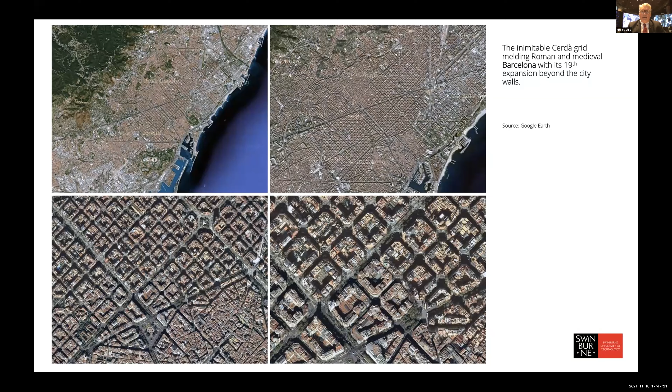I imagine a lot of people listening tonight will have been to Barcelona. I haven't met anybody yet who's not enchanted by it. There's so much on offer, and we're inclined to think what happens in Barcelona can only stay in Barcelona, but I wish we would find ways to bring more of this amazing texture to us.

So Cerdà actually was the architect, although he's an engineer, for the layout of Barcelona, that gives it such a distinctive look. And in 1859 he was given the task, first of all, to survey the area outside the city. As you can see on the slide on the right, when you expand a city, you consume all the wonderful arable land. In the case of Barcelona, it would have been cultivated for centuries, and that's the land that becomes the new city. It's bizarre. We do it too. We can see it happening to the west and to the north of Melbourne.

He was asked to find out where the opportunities were for growth, because it was impossible for the city to stay within the city walls. And he came up with this fantastic plan based on a theory which is Polycentric Egalitarianism. The idea was that Barcelona would not have a center, and to this day, it still doesn't have a CBD like most cities. It's polycentric and egalitarian because everyone was supposed to be able to walk to all the services they need, the schools, the shops, the hospitals, and their friends.

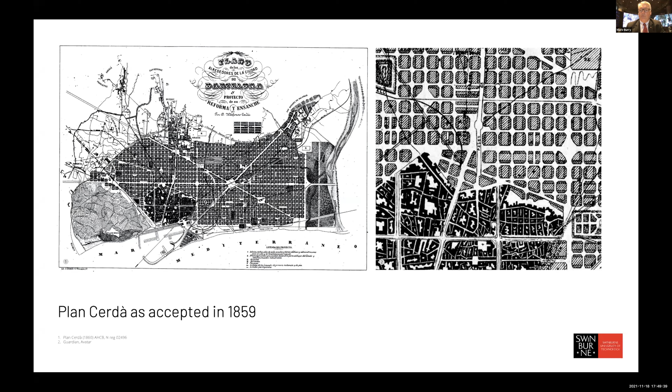And originally, you can see from the plan on the right, he separated the pedestrian infrastructure from the vehicles. So the vehicles were going up and down the streets in one way. But if you can see the lighter hatching between each block, that was meant to be parkland. And the idea was that you'd filter your way through. It started off well, it didn't quite complete. But the other great innovation was that he actually put all the railways underground, even at that date. So there's no grade level crossing removals required for Barcelona because they're already there.

He coined the term urbanization, so urbanism, which is a fantastically wide discipline. It's not a single discipline. It involves everybody who has an interest in how cities are created and evolve and function. And he made this 3-volume collection, which he eventually published in 1867, which includes maps. It's a book full of tables because he was one of the first ever to actually use statistics by measuring the city and how it functioned to work out what was the best plan for Barcelona.

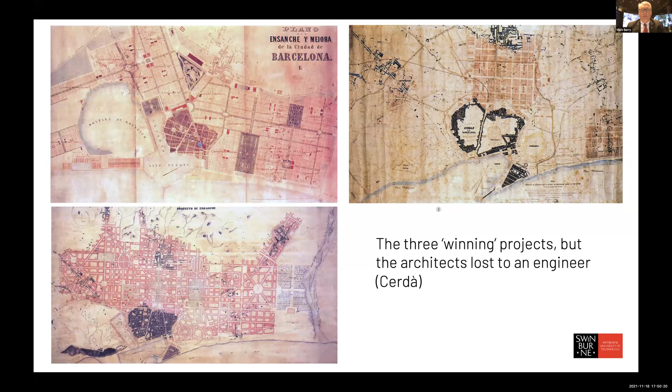3 architects won the competition for the extension of the city, but in fact they were ignored, and it was the engineer's plan. He even thought about trams, everything was all thought through. Yet when you look at it now, this isn't quite the Barcelona that he'd planned. It is polycentric. It's reasonably egalitarian, but it certainly doesn't have the separated pedestrian and vehicle infrastructure that he wanted.

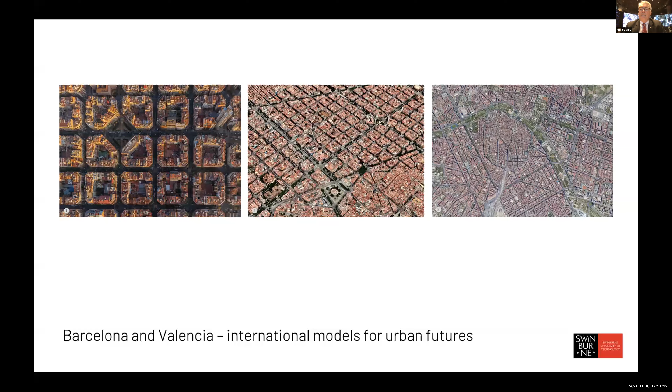The image on the right-hand side is Valencia, just to show that Barcelona is not the only fabulous city in Spain. Valencia has a river that used to flood, like a lot of rivers do, but instead of just sucking on it, they actually diverted it in the 1980s, 1990s. Now the center of Valencia has this elongated park running through the center. You can read the modern city with the medieval city in the core, and you can read this brave decision of diverting a river to make this linear park down the middle.

So Gaudi, what can we learn from him? I thought Gaudi architect plus because he was the original polymath. He's the only person that I would regard as genius that I've personally been associated with, albeit posthumously, through looking at his work. There was nothing he couldn't do other than finish his buildings on time and on cost. But I think that's a small detail for an architect of such caliber.

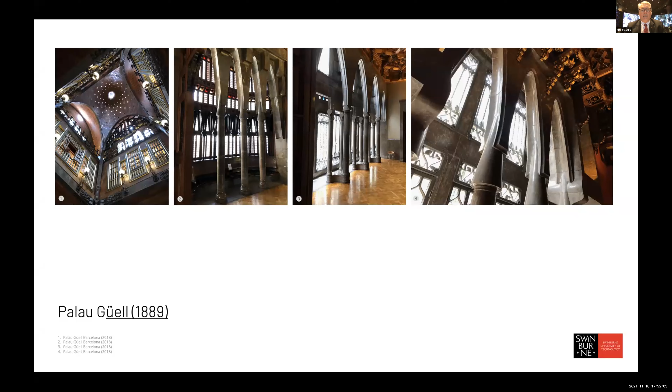Haven't got time to give you a tour through his work, but even just taking a townhouse like this one for his patron, Eusebi Güell, one of his first projects. So he was now qualified about 10 years. He was already out showing that he was pushing the boundary in every way possible, structurally, philosophically, light, heating, air. Even this building had a natural air conditioning system for the stables down below.

But one project defines Gaudi. This is what I regard as his best work. It's not his most important work, which is Sagrada Família, which I'll explain, but it's his best work because it's the quintessential Gaudi who actually understood the forces of nature, and that the architect and the engineer would have to come together if you're going to build a building that is going to perform optimally with these forces.

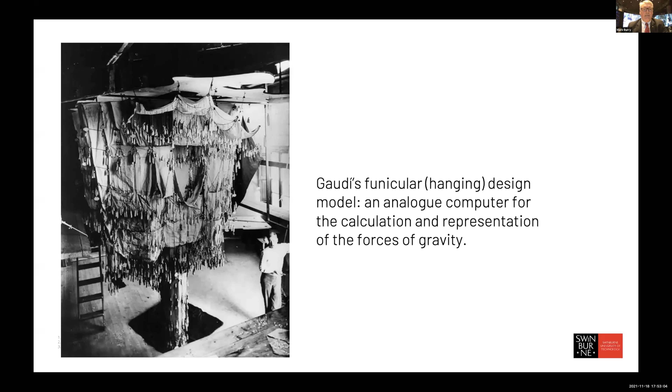So he designed the building as a model upside down. So you can see it here. Little bags of bird shot representing the weight of the building, so that he could see gravity itself describe the form of the building. Once it finished, and I must say it took about 10 years for this model to be constructed, it was painstaking.

You can see on the left-hand side, he just took a photograph, an example of Gaudi having to go into modern technology against his better judgment in order to photograph it, so that he could actually produce the client representation. So the client, it's an undrawable building, which is what drew me to Gaudi in the first place. In this case, he's photographed the buildings and then painted over them after 10 years to give the client a sense of what they're getting.

And then from the point of view of the builder, the same model, which was constructed in a shed next door to the site, just outside Barcelona, at a scale of 1 to 10, the builders could just measure off the model and build the building. And when you see the interior, it is just extraordinary. I'd love to talk about it in detail, but every single line of structure you're seeing here is meeting the forces that it's designed to accommodate head on. There's no bending forces being transmitted whatsoever.

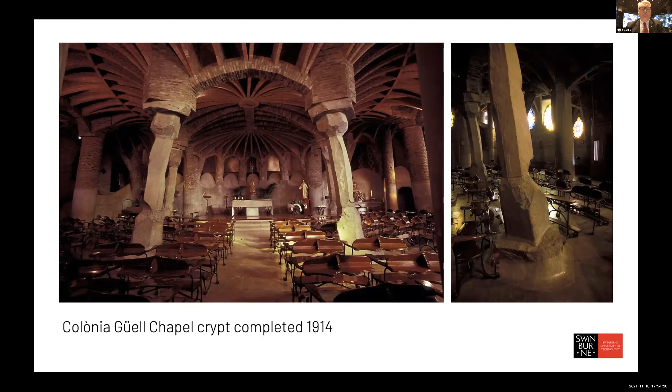And just one other thing to note that in this building, there's not one piece of steel or concrete. This is all just stone and brick laid using the time-honored Catalan vaulting technique. Just one sensational space, but unfortunately just the basement, because this is one of Gaudi's several heroic failures. After 16 years on the job, the client became infirm, and his children decided that this wasn't going anywhere fast.

When you look at the actual fabric of just this basement and the fabulous space of the crypt, you can see that enough was built for us to have a spine-tingling recognition that this is what genius looks like when you're trying to build sustainably. He's used brick only where it's required. You can see the lines of force where he's using a very modest amount of brick, and everywhere else he's used clinker, which is the byproduct of bricks that have been overfired.

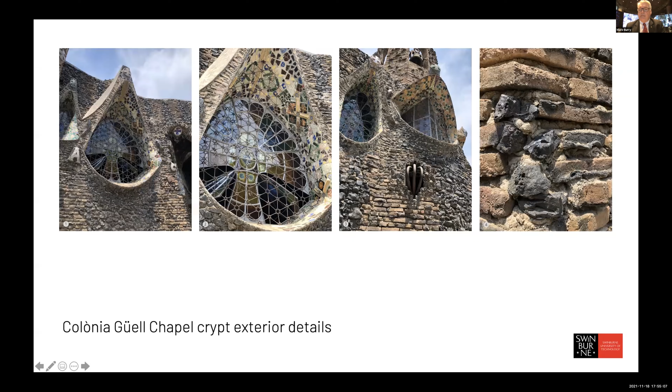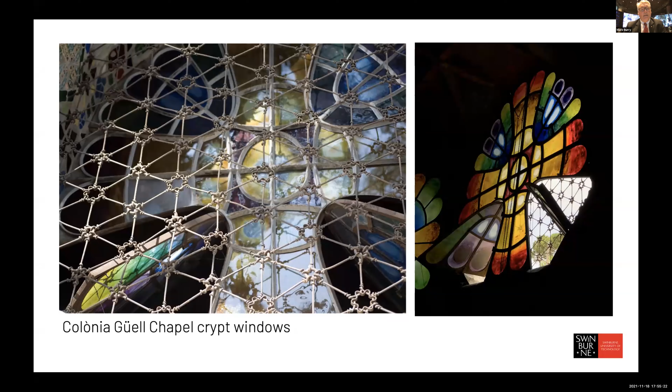Even the windows, you can see, are conceived as butterfly wings. There's the outside and the inside. And in terms of sustainability, he's also using the needles from the corduroy factory, which is what the little church was associated with, when they were discarded. Instead of throwing them away, he had craftspeople make them into these wonderful grills.

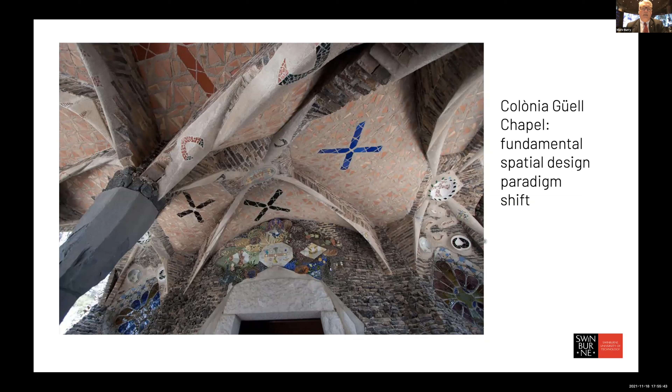But this is the slide. This is the fundamental spatial design paradigm shift that he brought to us, which is to think about what happens when you design something so complex that an individual can no longer have successful carriage of it. He must have realized towards the end of his life that he had far too many wonderful works that weren't finished, not least the Sagrada Familia.

And another thing to realize is that he was of his time. He wasn't some freak. Theo van Doesburg in 1924 wrote this fantastic manifesto about the new architecture. He includes: in architecture's next phase of development, the ground floor plan must disappear completely. The two-dimensional spatial composition fixed in a ground plan will be replaced by an exact constructional calculation, a calculation by means of which the supporting capacity is restricted to the simplest but strongest supporting points.

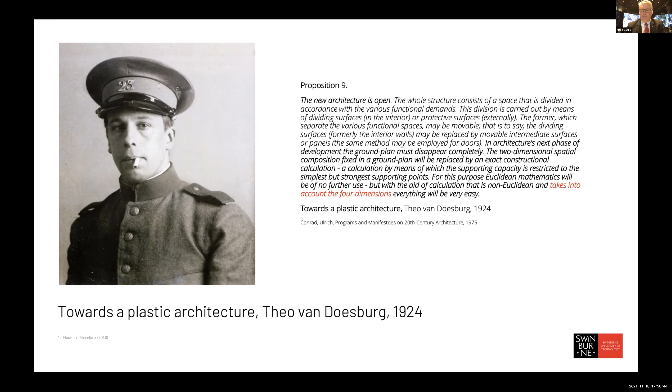For this purpose, Euclidean mathematics will be of no further use. But with the aid of calculation that is non-Euclidean and takes into account the 4 dimensions. Everything will be very easy. I didn't put everything will be very easy in red because that was exactly the problem. It wasn't. But it certainly was a fantastic shift from two-dimensional plan to 4-dimensional thinking. And that is what has been gifted to us as architects today with this wonderful invention of computers as digital agents to assist our creative energies.

The indulgent client: many factors contribute to Gaudi's uniqueness. His client, Güell, gave Gaudi complete liberty to set up this building laboratory to test his new approaches to design. The architect had throughout the years developed new methods of working which gave him initial unconventional 3-dimensional answers obtained with the help of scale models and full-size mock-ups, and without using the drafting table technique and its consequent limitations. We may say that the chapel, which is what this piece refers to, was not conceived or born as an ordinary building would be in any architect's office.

So you can imagine as a young architect setting out, what was being offered here by Gaudi was a way to completely rethink the way we design buildings and how we translate them into construction. And that's what we do when we learn from the Sagrada Familia.

The Sagrada Familia is not his best building, in my humble opinion, but it's certainly his most important building because of the fact that it had to be continued so long after his death without him there to help us.

Just making sure my time is working.

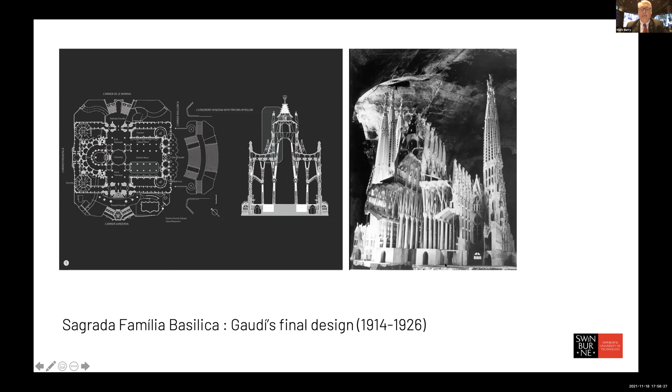I'm hoping you're all familiar with it. That's what it looks like from the outside. I'd like to say that it was a building that took him some years and iterations. He wasn't the original architect. He left in the end some plans that were destroyed in the Civil War of 1936 and comprehensive 1:25 and 1:10 scale models, which have now been translated into this incredible space.

These are photographs that are really designed not to give you the experience of being there, but to give you a sense that if you haven't been there, then you should go as soon as you possibly can. The interior effectively is completed.

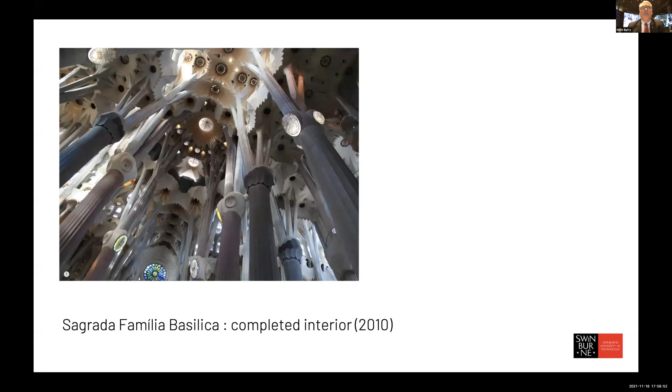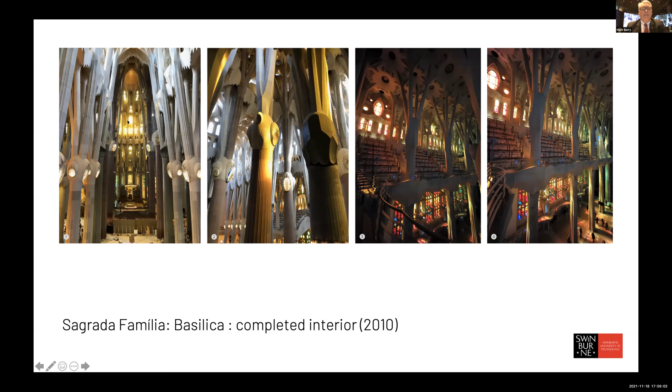He conceived of it as a forest with great columns, which are the trees and branches reaching up to the light. And we can see this play out in the tectonics of his decision-making. It's got colored glass along the 2 lower floors, but the upper floor is white glass. So you get this heavenly white light way above, 30 meters and above in the space.

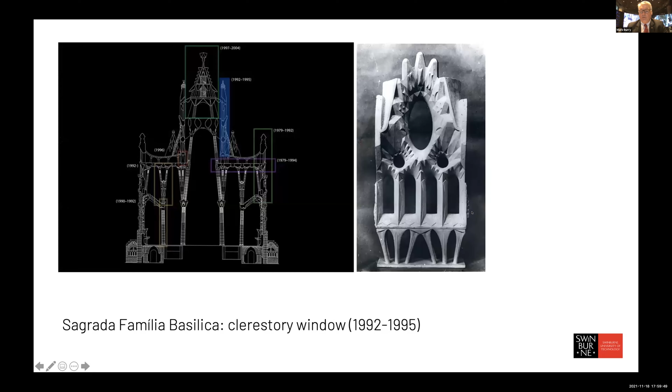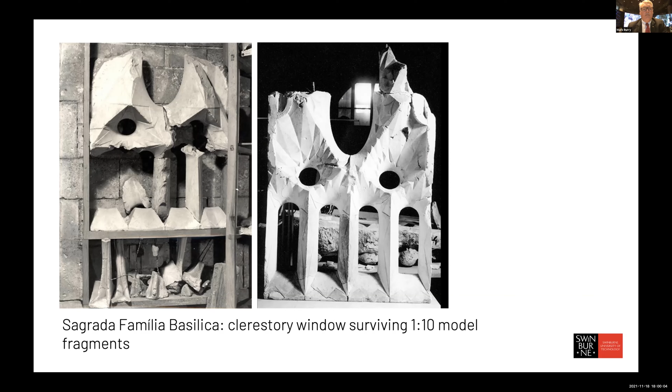I had to rethink everything I'd done at school. Nothing that was being asked of me at this time was something that was familiar. I was being presented with these pieces of broken model and asked to extract the geometry from them, because that's what the 2 90-year-old architects, my bosses, were able to bring to the party. They knew that he had a system, but nobody up to that point had a chance to unravel it.

And unraveling it only came when I took my architect's hat off. I put on that of a geographer and realized that I wasn't drawing these models, I was mapping them. And so I realized that I'd understood the geometrical consequences of surfaces which intersect in space. 2 surfaces intersect with ridges, and 3 ridges will intersect at a peak, known as a triple point by the mathematicians. And you can see on the slide on the right, that's exactly what I had to do.

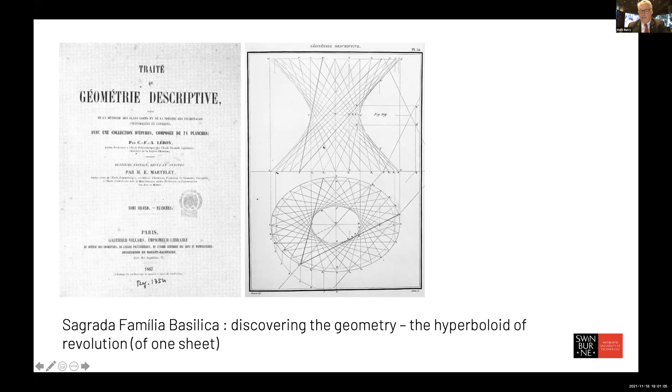For our Vice Chancellor, I'm sure she'll be pleased to understand, if you didn't know already, that Gaudi learned all his descriptive geometry from Leroy. This was the classic text for his time. 1/6 of an architect's training in the 19th century was learning all about descriptive geometry, and Gaudi uniquely understood the value of this geometry, which have lines in space which intersect on points. So any point on the surface will have 2 straight lines going through it. This means, in a nutshell, it's easier to describe to someone building it what they have to do.

I have an animation which I really don't have time to play, but I will do so anyway because it shows the theory. Gaudi was thinking in 4 dimensions. These surfaces aren't fixed when they're made in stone. They're implicitly derived from these hyperboloids of revolution. He saw them as fundamentally as sculpting. So even though we're using a computer here, we're actually crafting the surfaces by sculpting away from the notional stone.

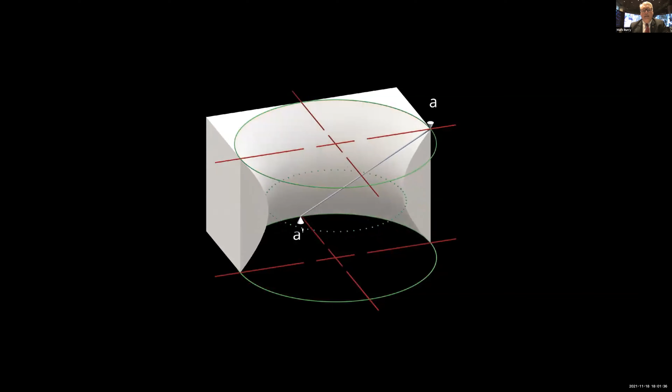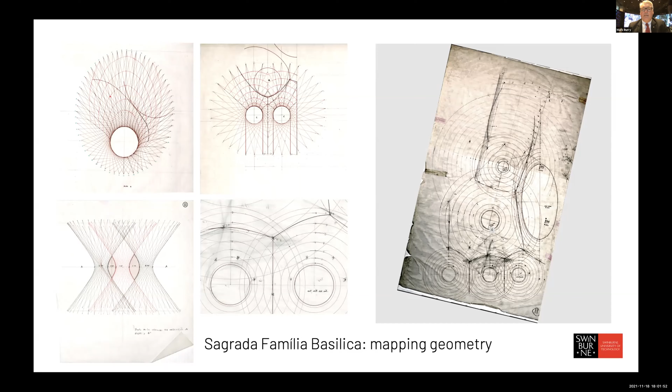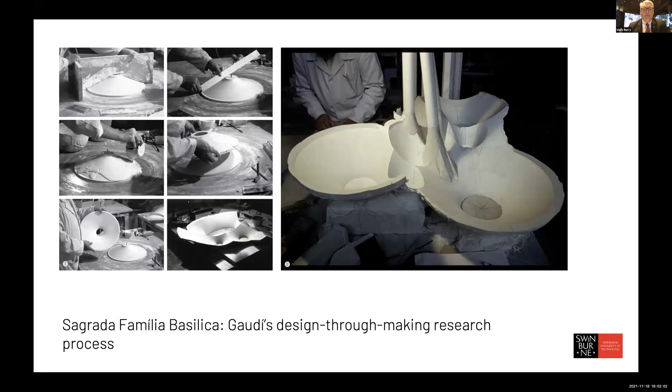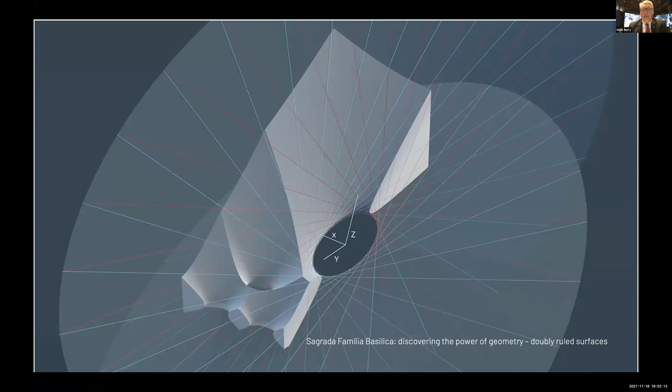But of course, I didn't have computers then. I had to think on my feet. So I was using descriptive geometry, thinking as a map maker, not as an architect. I had the legacy of the model makers who had been using Gaudi's own method for making models, which was Gaudi's way of working. This translated eventually into digital design, and I'll skip that video, and I will skip that video. I hope it's intriguing. And this one, which I'm going to skip too, it's also intriguing, but you can see this is what Gaudi was doing in his head, this fantastic ability to sculpt in 4D.

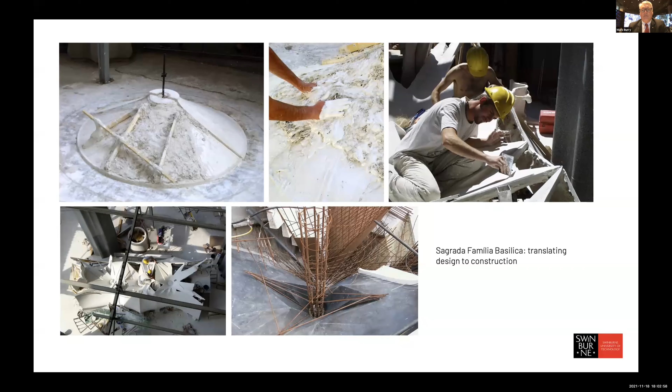So we actually translated his model making technique to one-to-one in order to make the molds to build the artificial stone. And also we had to translate these computer drawings into practical information. And you can see here just very quickly, the straight lines that describe the geometry are being deployed to build the formwork for the traditional Catalan vaulting.

And down on the bottom right, you can see that these geometries even have the most optimal arrangement for structure, because this is reinforcement, which is going exactly along the lines of the geometry, but also the lines of force. And there we have it.

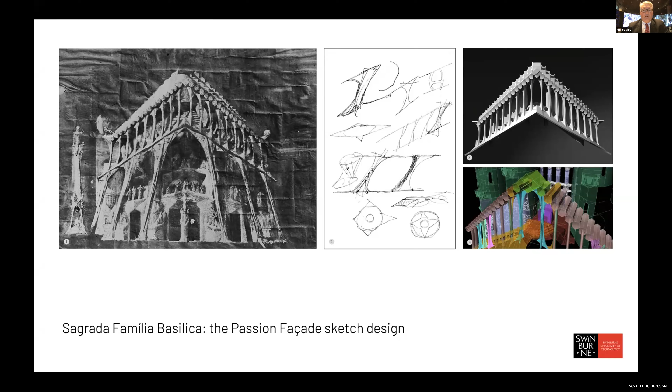The passion facade was when we started stepping beyond the modeling. We had to work from just this one drawing. And as you can see in the middle, we always begin with the sketch. We've never thrown away the pencil for the computer. But at each time, we think of new ways to work.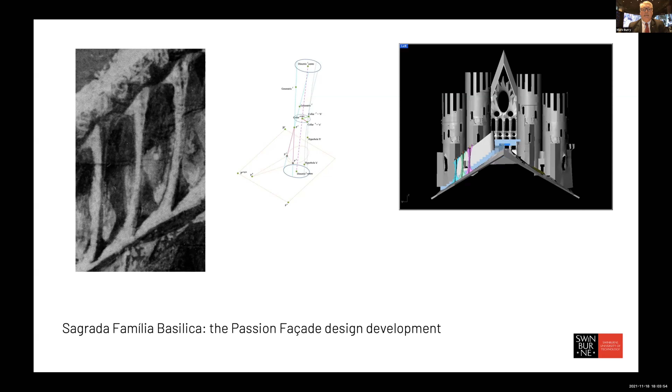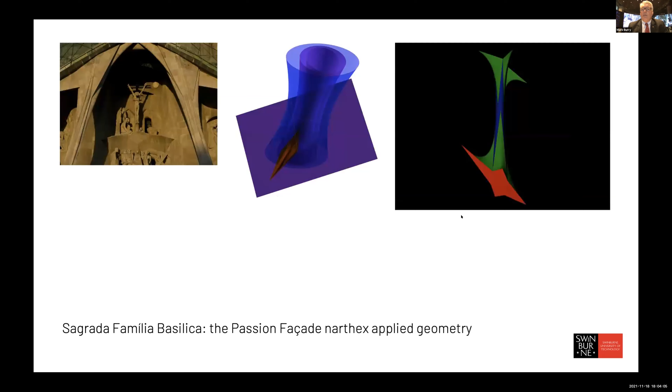You can see here, the only drawing of relevance is the one in the center, which is the schema, which explains to the computer scientists we're working with how this parametric, that's a flexible model, would be constructed so that we would be using Gaudi's surfaces exclusively with no fudging. This is actually mathematically very sophisticated. Also very controversial, because we didn't know how these columns would be seen.

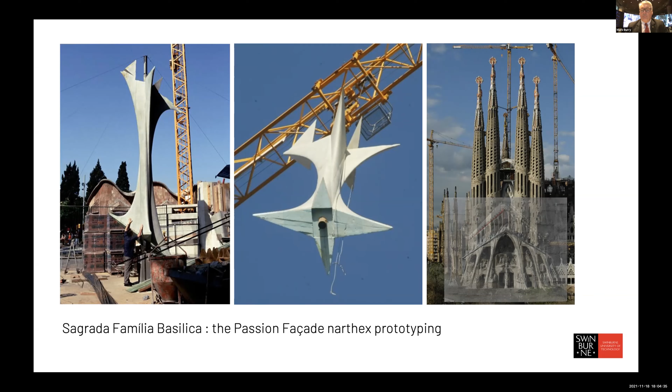So again, another shout out to France, because we went to Perpignan, where they had a machine that could carve polystyrene for us. This is in 2005, very hard to source that technology. Now, of course, it's abundant, only 16 years later. We had a polystyrene column made at full scale, which was then painted and put up on top of the passion facade, so we could see it for years.

Another shout out to France. You'd think there's some sucking up going on, but it's just true.

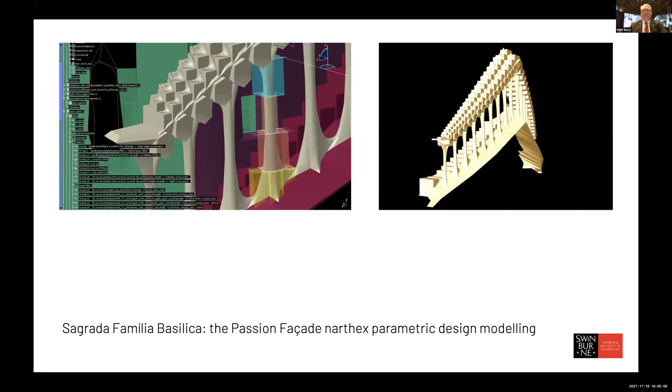This is CATIA from Dassault Systèmes. We couldn't use architectural software for this project at all. We had to go to engineering for aeronautical and ships and vehicles. And you can see on the left, the model by Jane, my partner, and on the right, the outcome of a 100% parametric version of our design for the passion facade.

So the first use of parametric modeling in any architectural project, and certainly the first use of robots for cutting stone, as you can see for the production. Oh my goodness, this is also interesting. This is a granite from Tarn, central France, which is the source of the best granite possible for this purpose, even though it's the wrong color. We wanted a golden color, but we had to go for the gray.

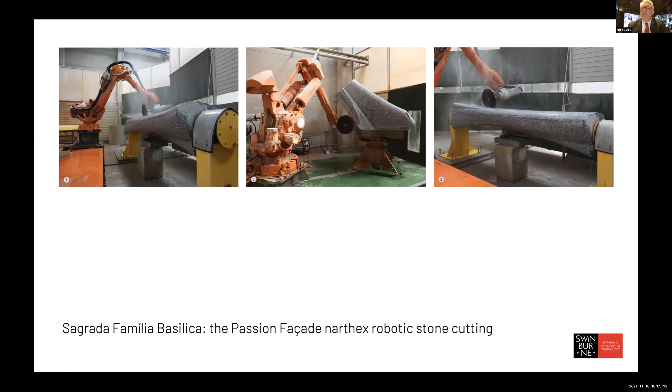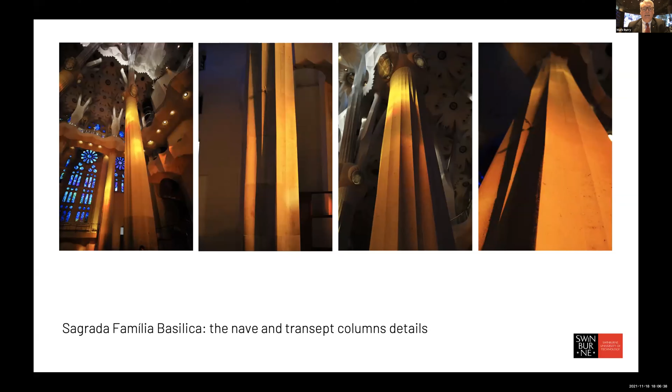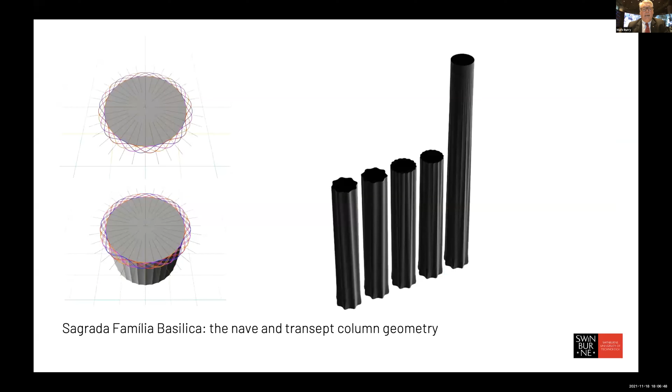I'd love to tell you all about these columns, but what you need to know is that they look abstract in terms of their sculpturing, but of course there is some geometry underlying them. They're playing out here. It's too big a story, but we'll show the video for this because it does attempt to give you a sense that this isn't accidental.

For instance, the 8-pointed column is 2 squares which are opposed by 45 degrees. You have a concave and a convex parabola drawn. In fact, it's a hyperbolic paraboloid, but you're seeing it in section. And this gives us a profile which cotangentally circumscribes the whole of the column and becomes the base. But in fact, it's not just one profile, it's 2 profiles.

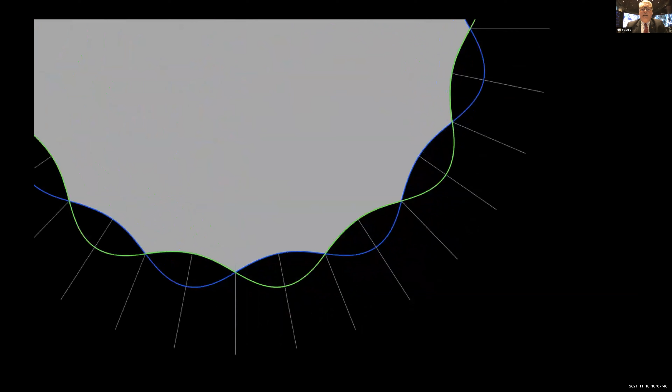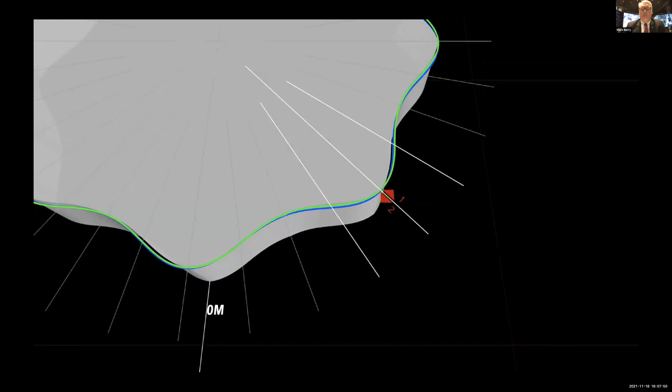And as the column gets higher, these two profiles counter-rotate. So the column itself is that material which is in common to the blue and the green profile. So here is the 4th dimension played out. I feel this is not a good idea to, I would normally talk about this for an hour because it's just so sensationally rich as a philosophy for generating a surface so simple. Two counter-rotated profiles, just as the column goes up, that's the 4th dimension playing out.

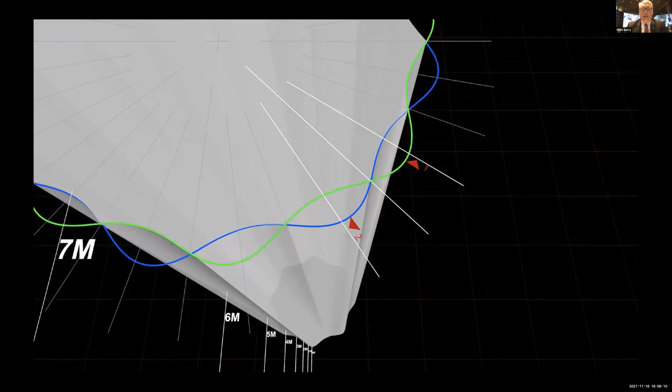Here you can see the column emerging. You might wonder what happens when it gets out of phase at the top. Well, I'll short circuit that one. The columns multiply, so then you get 2 profiles at the green and 2 at the blue. So this is what you'll see if I can just move this along a bit.

This gets to the top out of phase, and I think you can get it. The same thing happens again. So you're getting a duplication of the profiles. I think this is extraordinary because it's like a cell division being enacted in the columns.

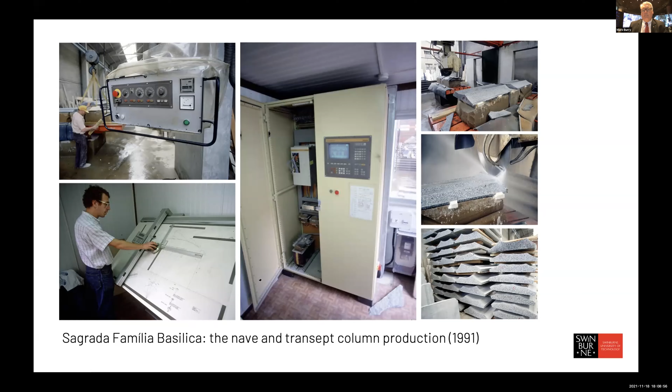First project to use a combination of manual drafting and digital stone cutting. This time we've gone to Holland. Actually, this predates the columns I showed you before, where we're using a saw making these cuts. A very painstaking process, even though the digital saw made things a lot quicker. We had robots on the Sagrada Familia before we had computers doing the designing.

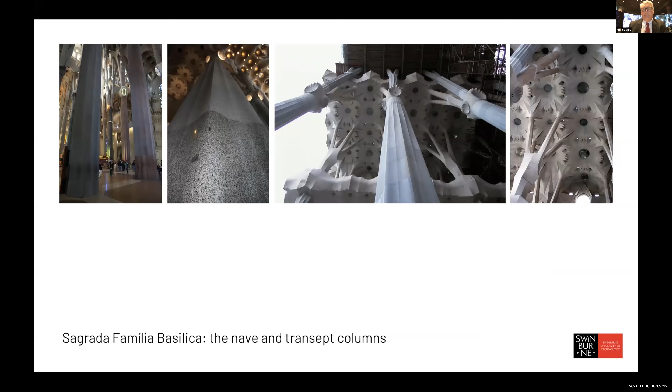And here you can see it. And Señor Bonet Garí, the last director, made the decision to keep the texture of the saw as an honest manifestation of the technology that had been used to make these.

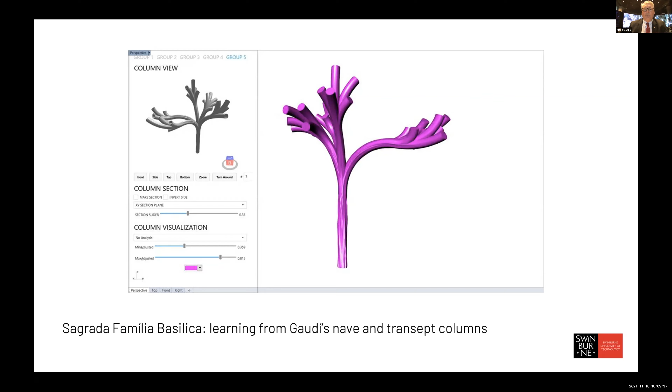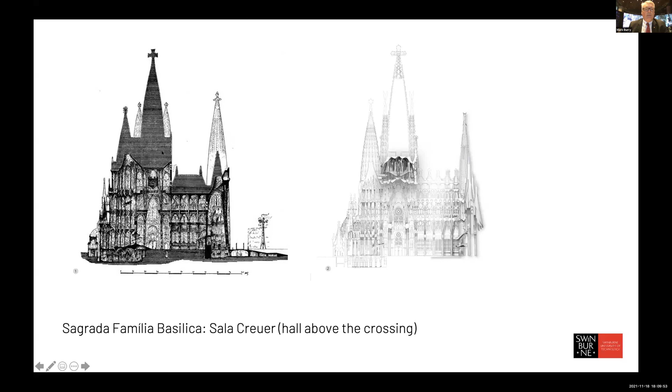I run a workshop in Barcelona at IAAC, the Institute for Advanced Architecture of Catalonia, as part of my research, looking at what Gaudi would have done if he'd had access to these tools in his time. So we have these wonderful students taking on the paradigm and seeking to find ways to do this. And the Sala Creuer is the first time where we actually have no evidence at all. Gaudi unhelpfully left us with this blank slate to work from.

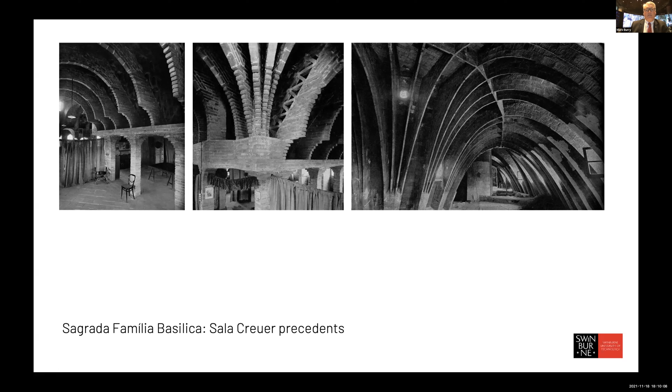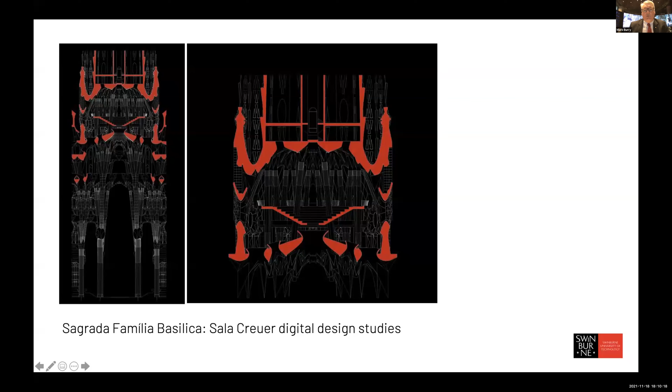But any attic space in a Gaudi building, whether it's Bellesguard, a private house, on the middle two on the left, or the Casa Milà on the right, there's no space too humble not to get the Gaudi touch. So that's why we gave it everything we could to make this auditorium, which is suspended in space. Light can come into the auditorium while people wait going to the top, and light can go through and through the vaults below.

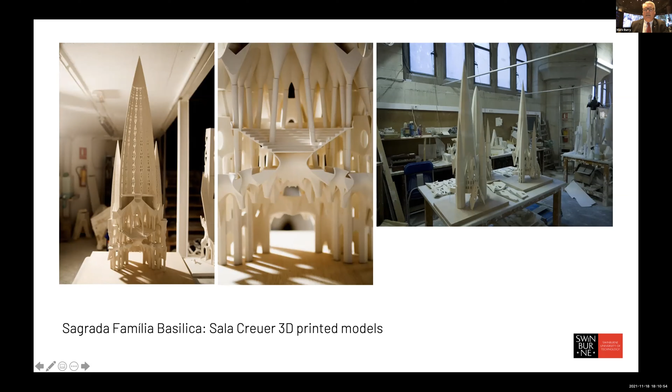This is the first time we used what's called a shared digital model in the mid 2000s. I thought everybody would be doing that, but no, we're innovating in there again. CATIA being used; each one of these lines is a different part of the building being modeled parametrically by others in the team. We're able to bring in 3D printing. Yes, the first project of its kind to use 3D printing as part of the design toolkit, and we could actually print three separate designs in 1 week in order to assess this.

When I was asked by an esteemed colleague at RMIT to provide one photograph that summed up the Sagrada Familia, this is it. It's the fusion of every type of technology, old and new, original Gaudi models, 3D prints, we've got drawings, we've got digital projection, and even provisional materials and photocopies, all being brought to make a very rich conversation. I love these.

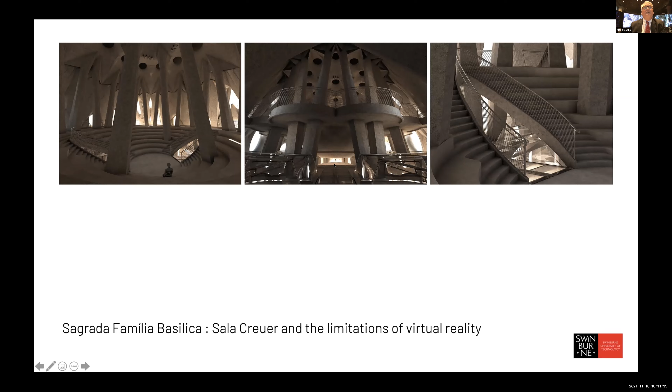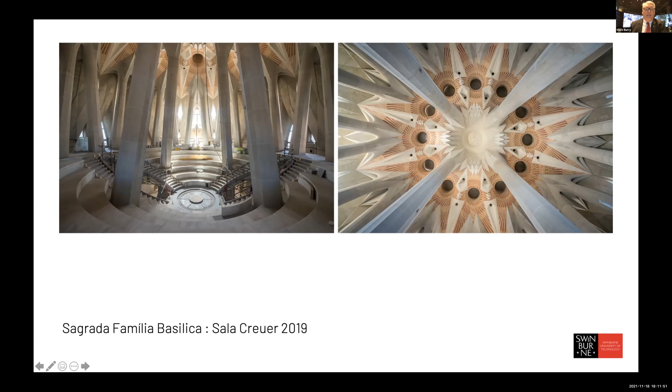This was using our best resources in Australia for some virtual reality. And I'm pleased to report that while we can actually model glass and steel very well, we cannot model these spaces sufficiently well to give us an impression of what we're actually going to get. And here you can see is the outcome, nothing doing. Risk-taking because we had no way of calculating whether this space would be light enough. And it wasn't until the scaffolding was taken away 7 years later that we could see, in fact, it is light enough.

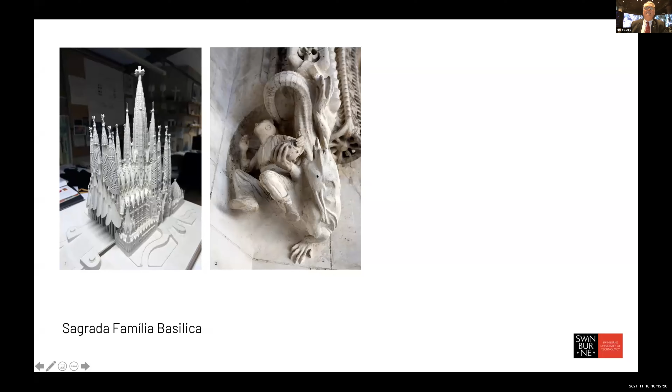So Gaudi, just to finish up, really, on the right-hand side, you can see, even with this advanced thinking around geometry, he was also very much a social person. He's representing the temptation of people into violence. This is the temptation of youth into anarchy by this strange creature that's offering a grenade in 1896. So if you look at the building in detail, you'll find that Gaudi wasn't just abstracting in the way of the columns I just showed. He was actually hyper-realistic in some of the portrayals.

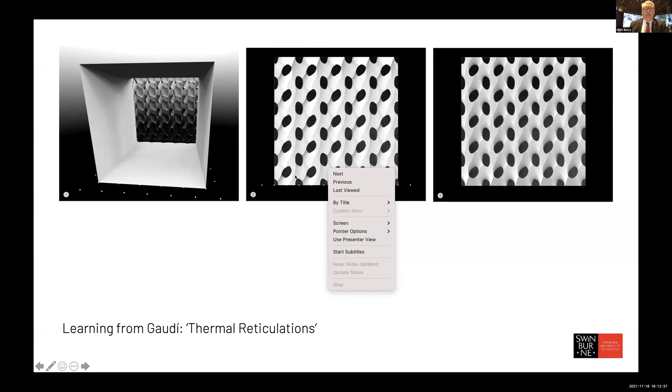So these hyperboloids of revolution don't just finish at the Sagrada Familia. We've a number of projects where we've been looking at how they might be deployed today, looking at surfaces generally.

Well, designing the digitalized city: last year, finally, Architectural Design had an issue called Designing the Digitalized City, where I was able to get all my heroes around the world to talk about what it is to be a city, what is the historical basis of a city, how do we capture data, and how do we analyze it to inform us of the future, and also how do we represent this.

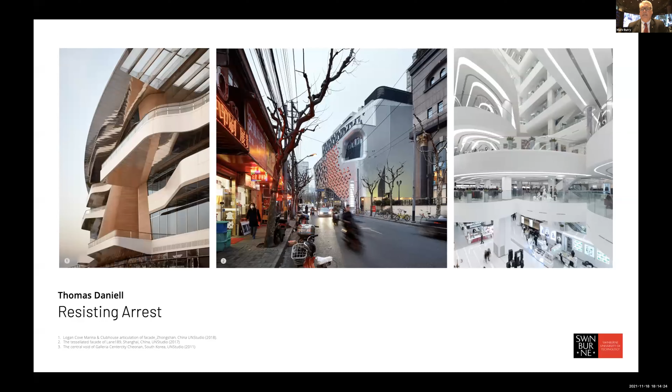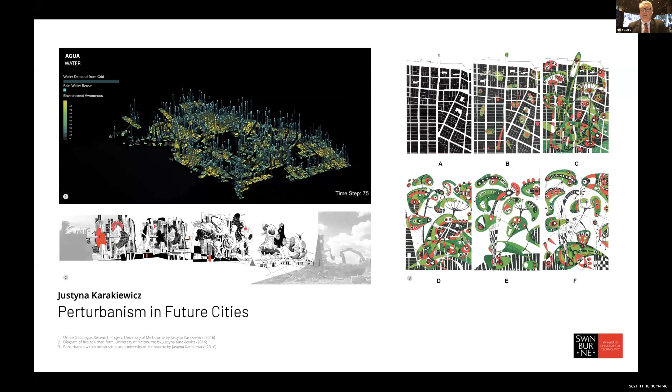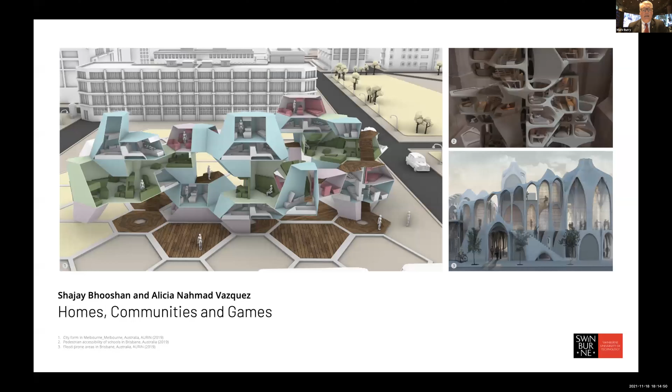memory and history. This is looking at Resisting Arrest by Thomas Daniell, the dynamic nature of contemporary architecture that just gives us a feeling of life. Tom Kvan at Melbourne previously, looking at how data can fundamentally inform design. Carlo Ratti, who has used data with a number of amazing tools, looking at cities as complex adaptive systems, deep diving into the unknown unknowns through AI and data, augmenting reality through data, thinking about communities and absolutely radically rethinking the way we live.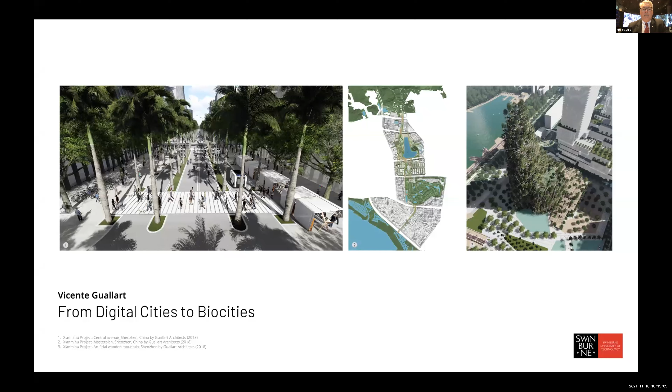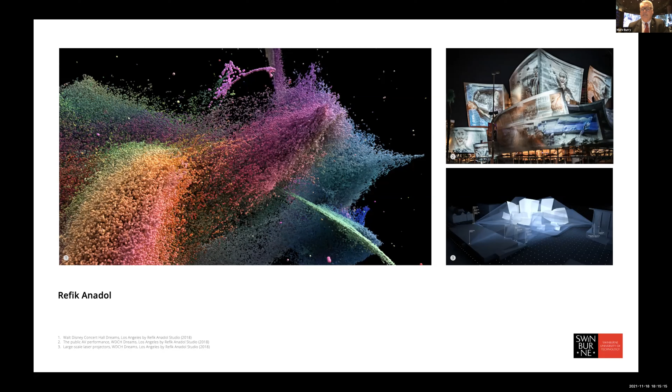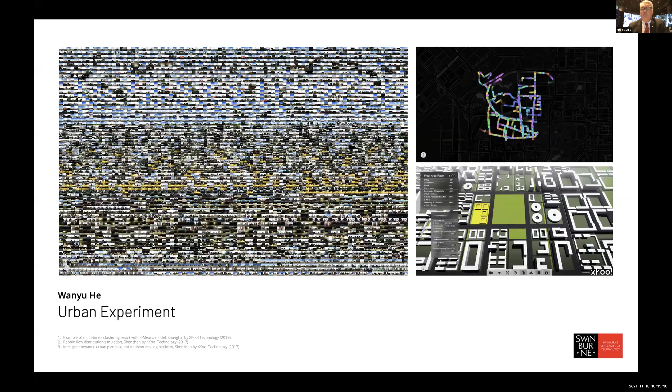The non-architect contributing to architecture. This is the former chief architect of Barcelona talking about the migration from digital cities to bio-cities. Refik Anadol, who had a marvelous piece at the NGV recently, who projects onto buildings to give a sort of meta-narrative. Data-driven urbanism. This is Wanyu He from Shenzhen, who has a team of 90, they can do things like go through all of Google Street View, capture the images, and using AI, work out the features and design buildings that absolutely match the neighborhood. Is that going to replace architects, we ask?

Ernest Fooks wrote this book about Melbourne in 1946. He talks about cities where people have to walk 15 minutes or more to the nearest public conveyance. He's already describing the highways that get in the way. Melbourne, he says, shows all the features of a haphazard and uncontrolled sprawl. That's 1946, over 70 years ago. We knew where we were going, and he showed us in this amazing book. The continuous urban development extends to 32 kilometers from the center of the city at that point.

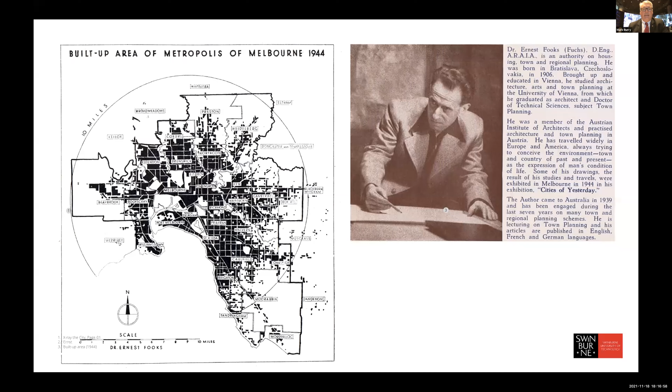There's plenty of stuff going on now. We want to have desired outcomes. The Local Government Act of 2020 aims to ensure all Victorians have the opportunity to engage their council for the future of the community. In fact, it's mandated.

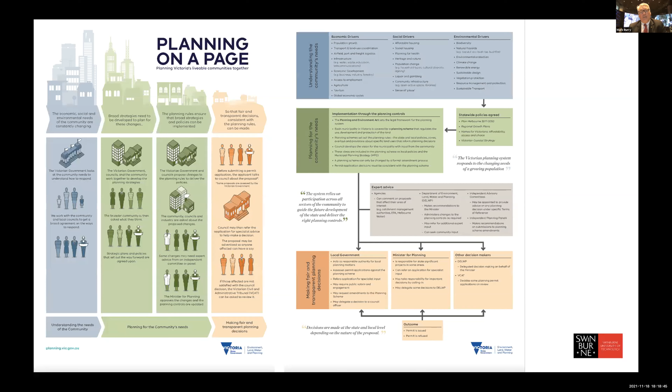We can see planning on a page. It's actually two sides of one sheet, but it's fantastic when you look at it. It's all there. It's telling us what we need to do, where we want to go, but I don't think it explains how we're going to do it.

The act of this idea of community engagement, I'd further word it participation myself. Engagement suggests that a power is allowing you to become involved with it, which of course is probably how it is, but participation, I think, from the citizens' point of view, is much more friendly. We're all in it together, because indeed we are.

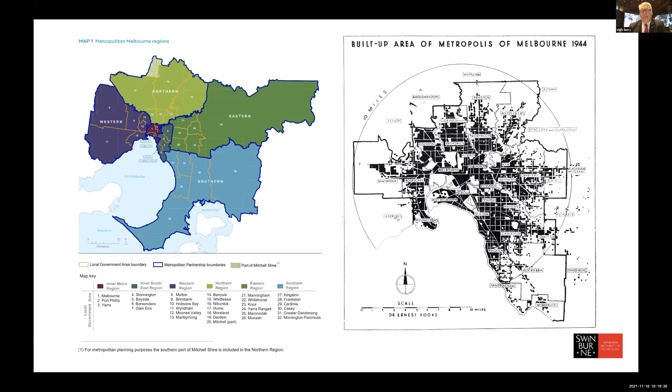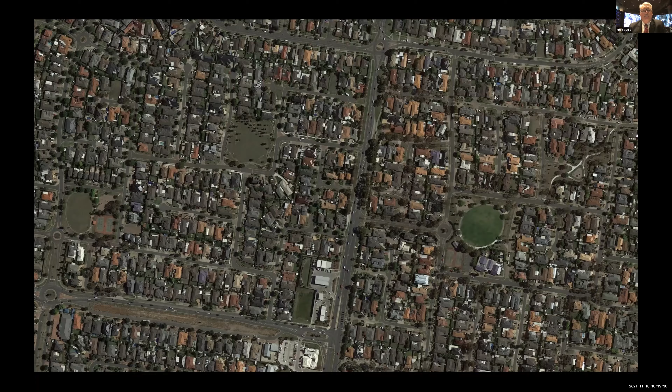There's heaps of stuff going on. There's not a lot of happy people around about whether we're being consulted enough. I also get why it's so difficult. The suburban rail loop, if everybody knew where it was going, they'd be busy buying land to speculate. So that's apparently one of the reasons why it's been behind closed doors. But that seems to be in complete opposition to what we really want, which is citizens being involved.

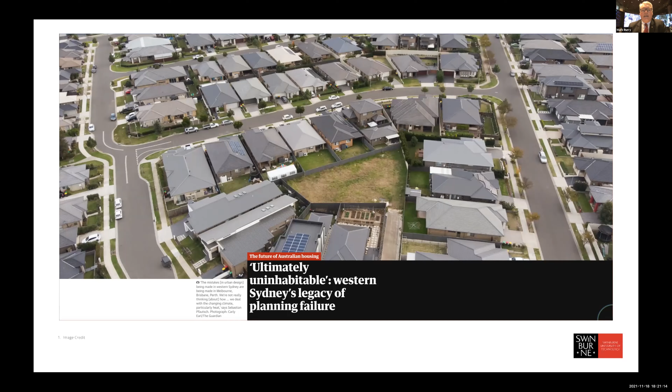This is this week's Guardian. On Monday, the broken dream in Melbourne: people making their moves to affordable housing at the outskirts of the cities, but not accessing schools that were promised, or even the railway station didn't appear. And this one, a follow-up on Western Sydney, all these dark roofs, which we've since learned have been banned because they're just great heat collectors. So where are we going?

Well, Peter Seamer in Breaking Point, which is 2 years old: the Australian public needs to start demanding answers from the politicians. This can only happen if the public is aware of the issues and their potential solutions. Those involved in planning our cities need to bring these issues to everyone's attention. The need for localization should be center stage in any discussion about our cities.

So I have a 3-minute video. I don't know if the sound will play. If it doesn't, I'll talk over the top. Maybe somebody put their hand up, Tom, if you can hear it. Thank you.

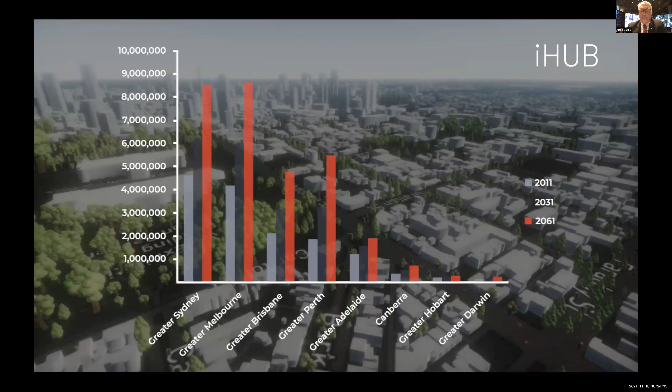So iHub is simply a facility where everybody can bring their visual information, whether it's photographs or what drives them mad, to an expert's graphs and tables, and put them up on the screen at the same time. It's not sharing the PowerPoint and taking your turn, it's having it all up. Super transparency from experts saying how they make the decisions, and from the participants from the community explaining what's important to them. It's only just finished.

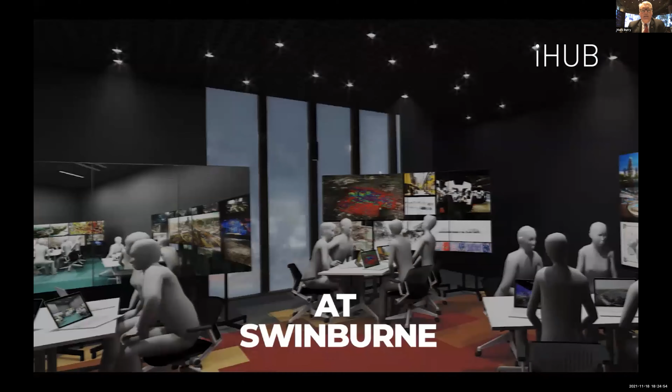This is one of the first times it's been used, thanks to the lockdown. So we've been relying on these virtual images of it being used, but hopefully in a month or 2 we'll be able to post images of real people doing real things and thinking about the city and where it's going.

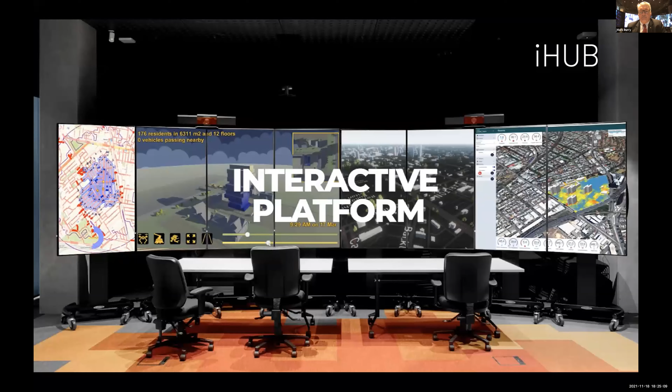This is our message. This is our vision at Swinburne, where we're bringing people and technology together to build a better world. I'm echoing the Vice Chancellor's statement earlier. This is where we're going, and I hope you're seeing a fusion of this artificial intelligence and the space we're in. But there are some great books.

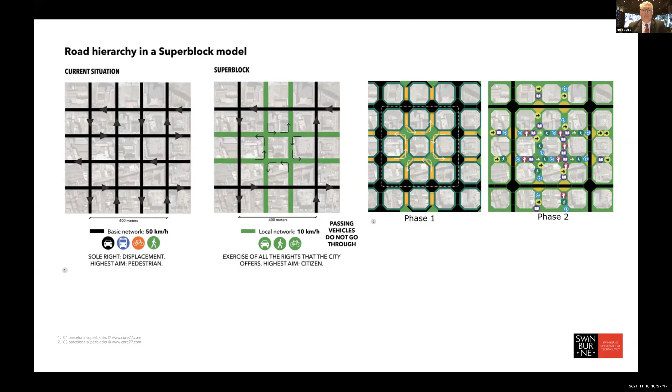Last word for Barcelona: they can take Cerdà's grid and modernize it by simply making a decision, through citizen participation, that the green roads will no longer have cars going over 20 kilometers an hour. It was 10, but through empirical observation, they needed to make it 20. Imagine that, if we did that in Melbourne, just said that a large number of our roads are no longer drivable above 20 kilometers an hour. Imagine Glenferrie Road, for instance. I gather Phil's here, he won't be very excited by that idea, but I think if you're a pedestrian and you're not dealing with the traffic management, as the council must do, it makes a much more livable city.

So I hope I've made all those points in this record time. I know I'm over time.